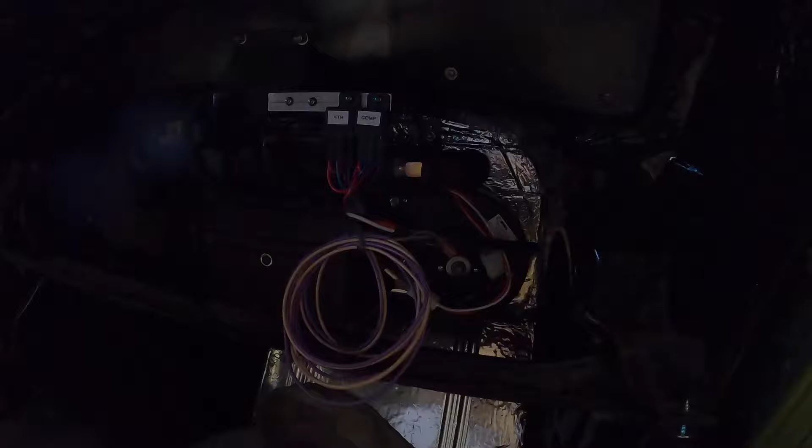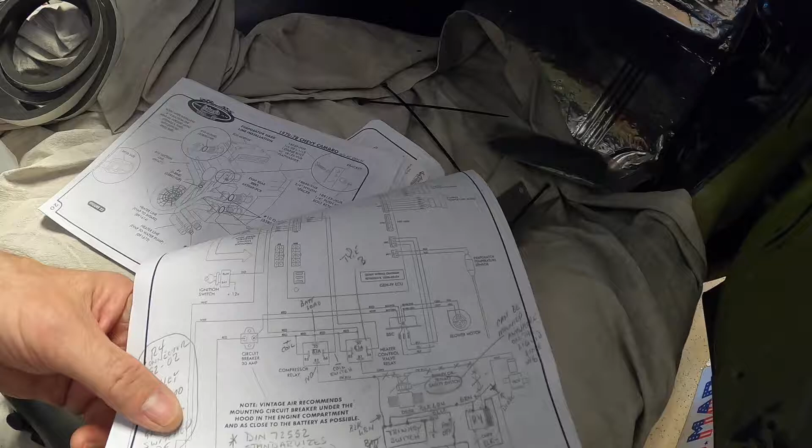I'm in the process of finishing up the wiring inside the engine compartment, and I just about got the vintage air AC done. I thought I'd check these relays and make sure they're wired up according to what Vintage Air is showing on their diagram. Looks like everything's correct, so all the wiring is going to the right places.

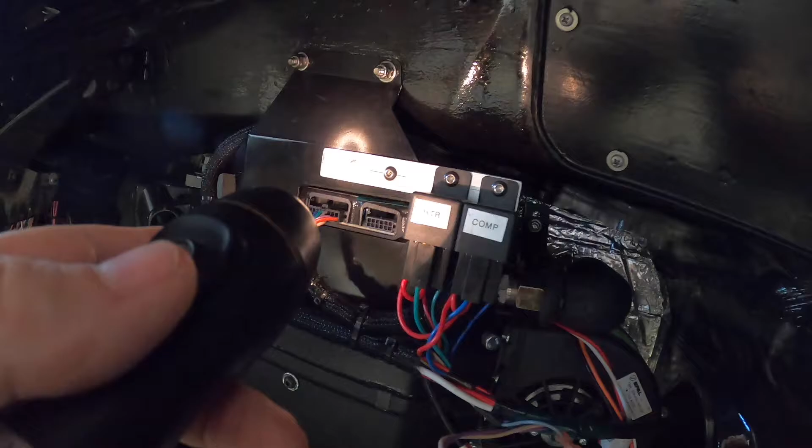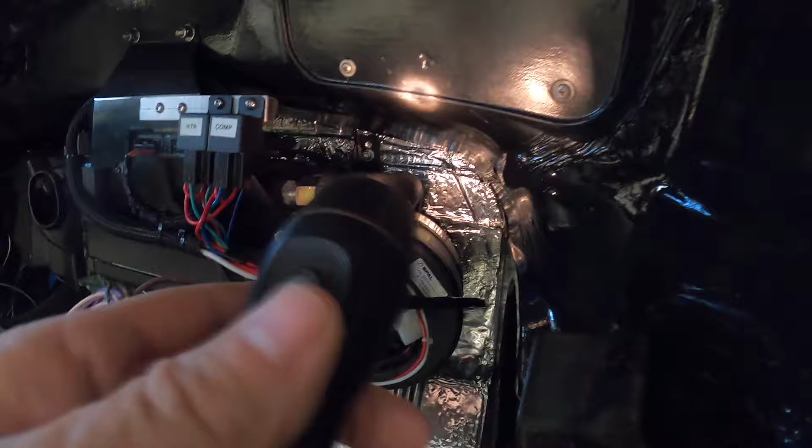I was trying to figure out the best place to mount these relays and still be able to get to them, so all I had to do is stick my head under the dash. I saw some people mounting them up here underneath the firewall dash area, and I've seen some people mounting them over here. I decided for me personally it would be better to put them here, and that seemed to be the easiest place to get to them.

So this is just a piece of aluminum flat stock that I cut, drilled some holes through for this top mount, and that way I can get to the nuts on the back of these relays pretty easy. Anyway, pretty much done in here.

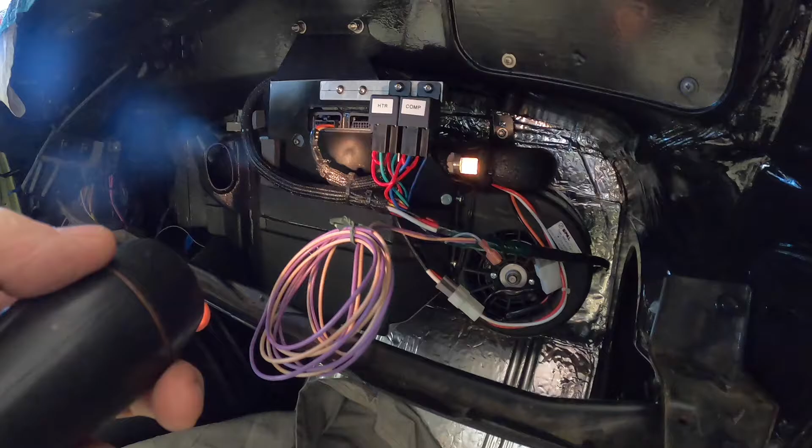The violet wire is your ignition power, and this tan wire is supposed to be for a dash backlight. Not exactly sure, maybe that's for the controller - we'll figure that one out later. And this gray wire here with the connector, the directions say that's for programming, so I don't think I'll have any use for that.

Anyway, we're pretty much done in here other than running the ducting. So we'll go out in the engine compartment and show you what's going on there.

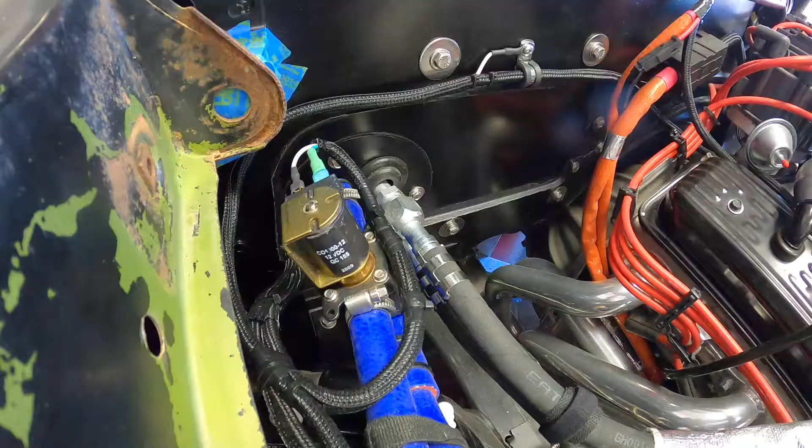My Vintage Air kit's pretty old, I think I bought it at least 10 years ago, maybe longer. So this is the heater solenoid valve that they provided, and it's kind of big and clunky. They sell a newer version now, a replacement in case this burns up - it's a lot more streamlined, seems to be more plastic, more lightweight. But anyway, this is what I got with my kit from Vintage Air.

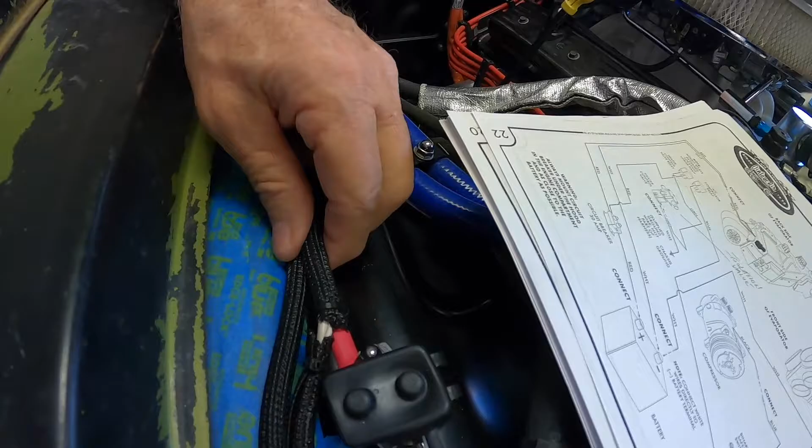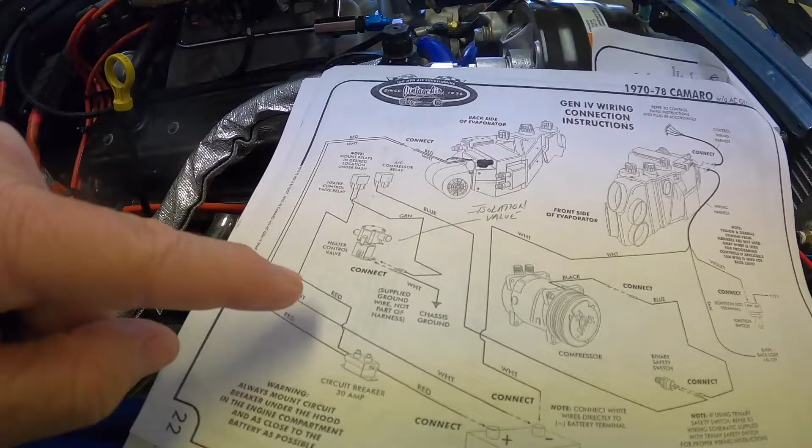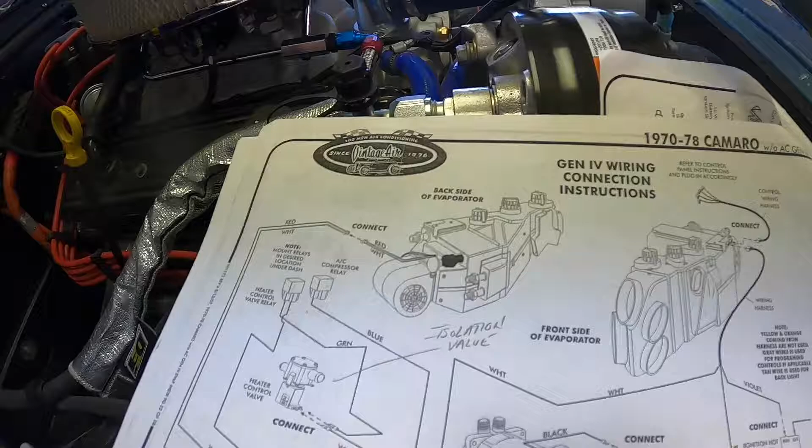The white wire here is your ground, and the green wire is what comes off the relay. There's two white wires in the sheathing and two red wires - this white wire here and this white wire here, that's these two. Then they provided two red wires: the smaller red wire is for the heater control relay, and the big red wire is for the blower, which goes through this 30 amp circuit breaker.

There are three styles to this: a manual reset where you have a little button on the side to reset them, an automatic reset where once the issue goes away or the circuit breaker cools off it'll reset itself, and a third style where you have to disconnect power from it in order for it to reset. I don't know which style they gave me, other than it's not the manual reset, so I think it's probably the automatic reset.

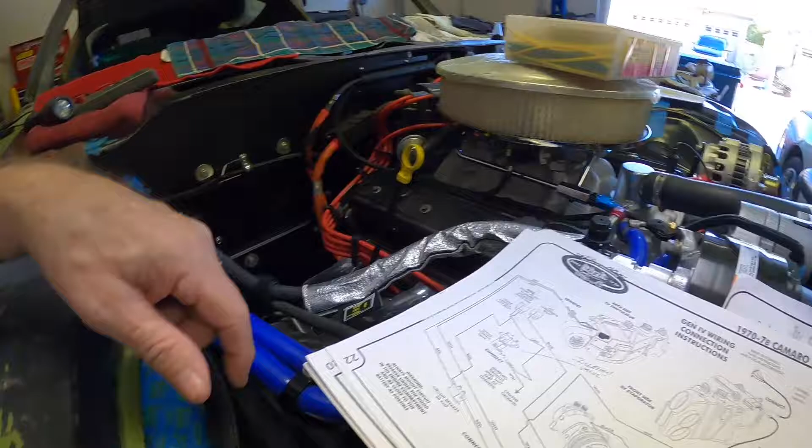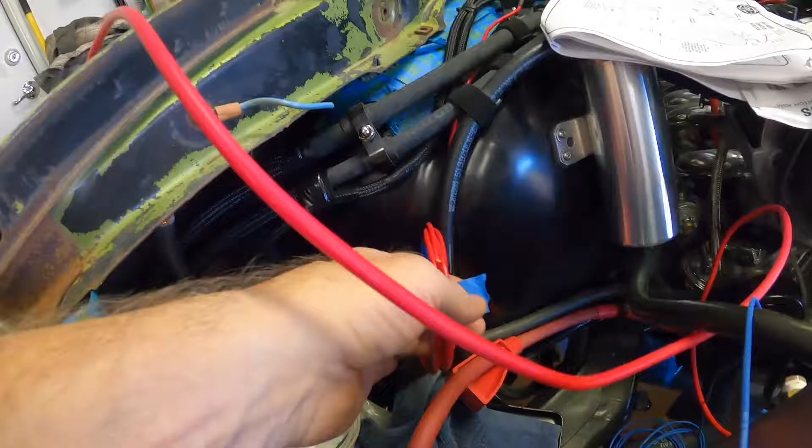In their instructions, they say to hook the hot wire and the ground wires directly to the battery. So that's this hot wire here and these ground wires. That's pretty much the wiring to the battery.

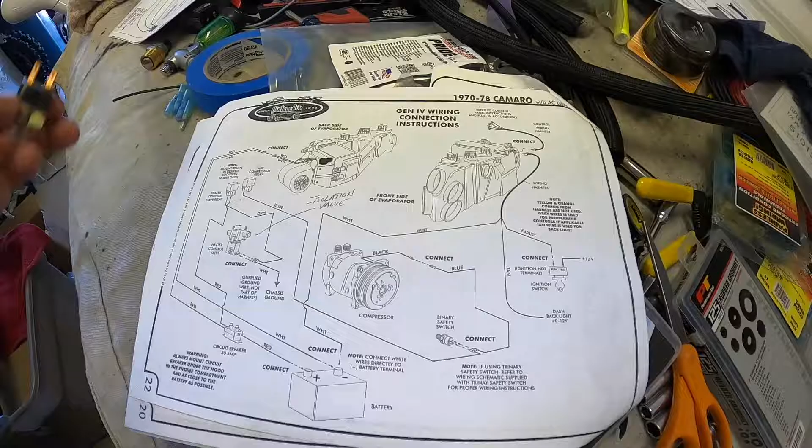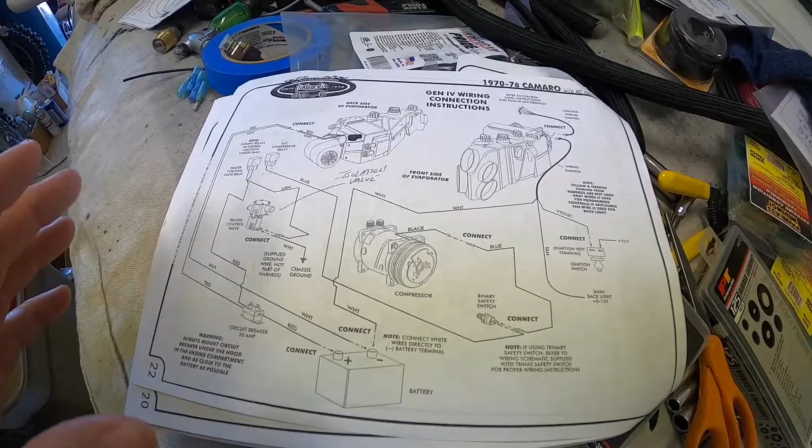Now their diagram here is set up for a clutch fan, a belt-driven cooling system, and that's why what originally came with the kit was this binary switch. So you won't see any fan controls here - it's pretty simplistic. You can go to their website and they'll show you how to do it with a trinary switch and electric cooling fans, which we're going to get into right now.

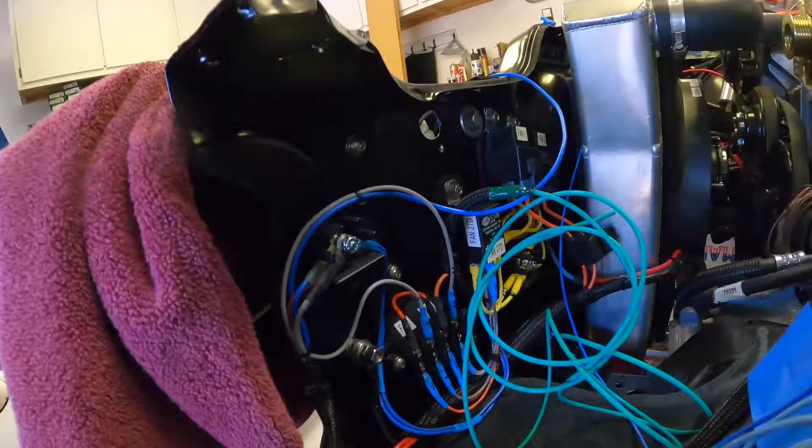So here's the trinary switch that I'm using. These green and black wires control the compressor, and these blue wires provide a ground for your cooling fans. Because I'm running electric cooling fans, there's my control system for the fans. But anyway, off the trinary, the green and black wires that I was showing you, that's what controls the compressor.

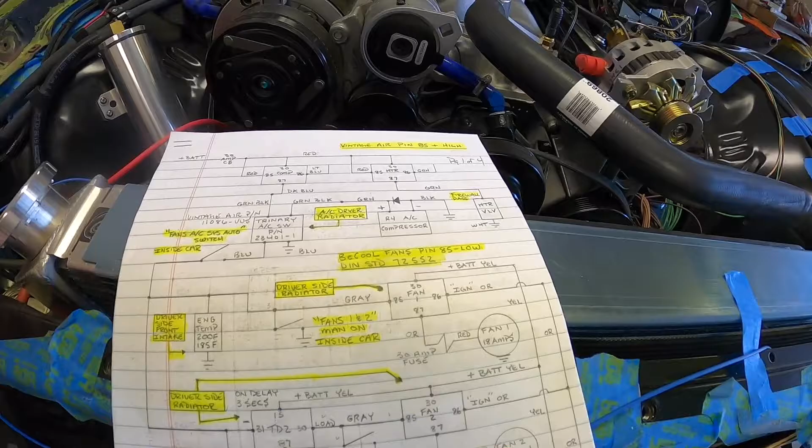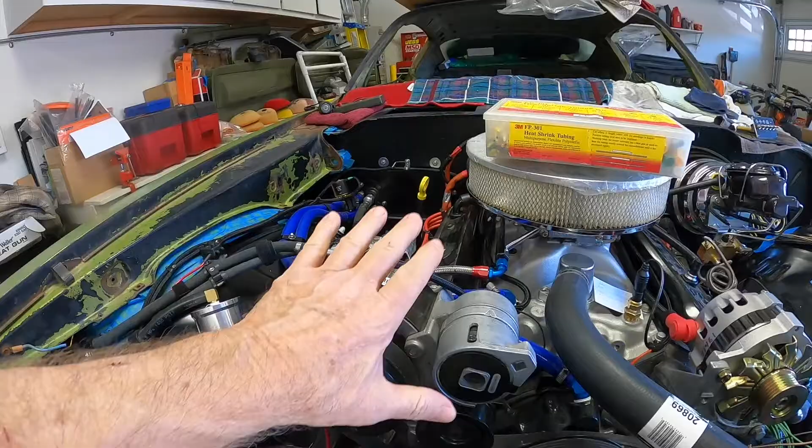On my compressor, I'm running a standard GMR4, and because I'm running Dakota Digital electronics, I decided to put a diode in here. What that diode does is prevent any backfeeding when the magnetic field on the coils collapses. When you kill power to this, it's going to try to maintain that current flow in reverse polarity, and it could backfeed the system with some current or voltage. Now, if your car is all electric with no electronics, you probably don't need to worry about the diode too much, but just to be on the safe side, I included it.

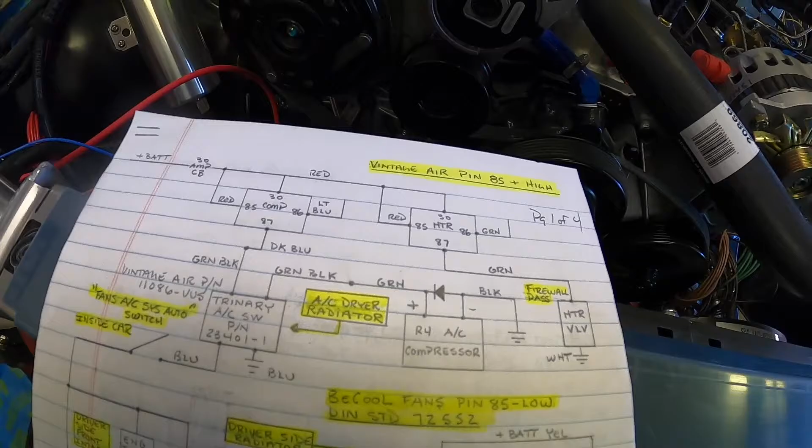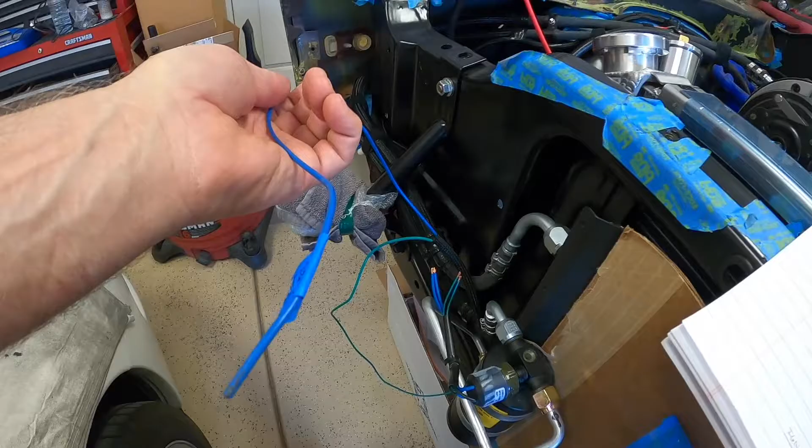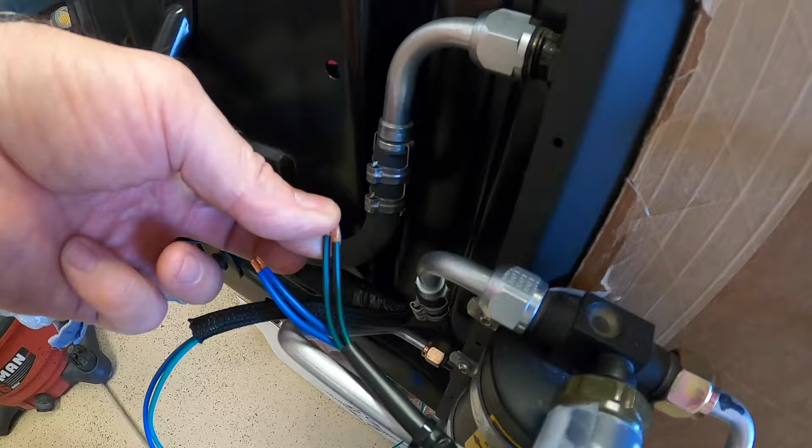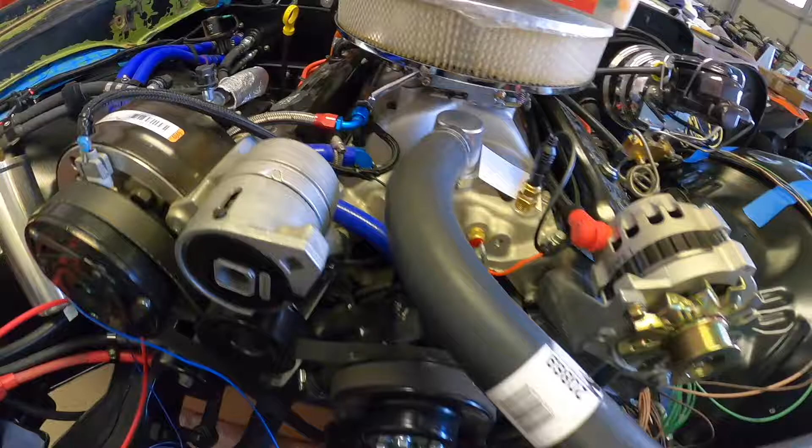Vintage Air used a dark blue wire coming off the relay inside the car and out through the firewall, and that's this one here. That's going to one side of the trinary switch, which uses a green-black wire. This green wire here is the wire that I put in, and that runs all the way over to the compressor. The other side, the ground, is the black wire right here. It would have been nicer for them to use a dark or a green or a green-black wire, but anyway, it all works.

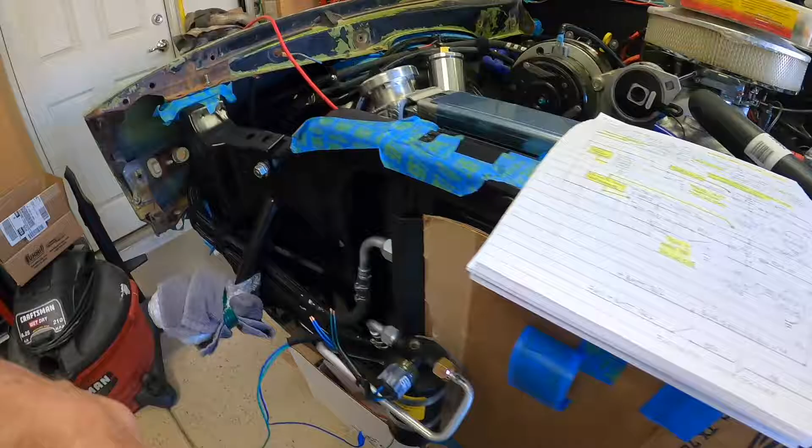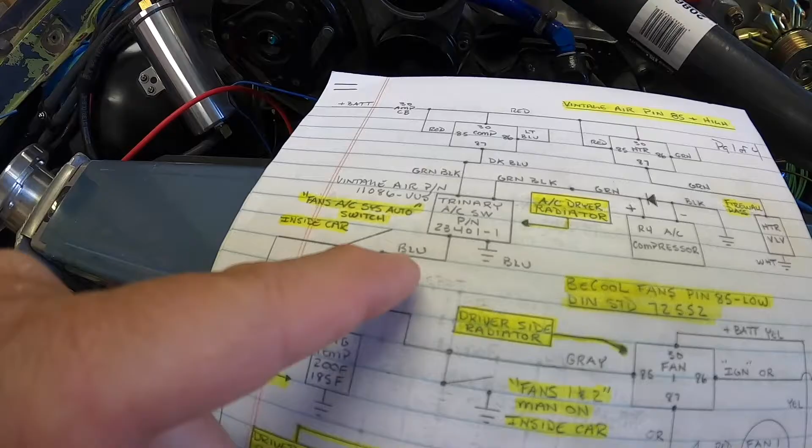For the radiator fan control, I ran a blue wire off the trinary, which is this one right here. This is going to go through the trinary, and then that wire runs inside the car up to this switch here. So that's this wire here coming off the trinary, and it's going to run through a switch that I installed here.

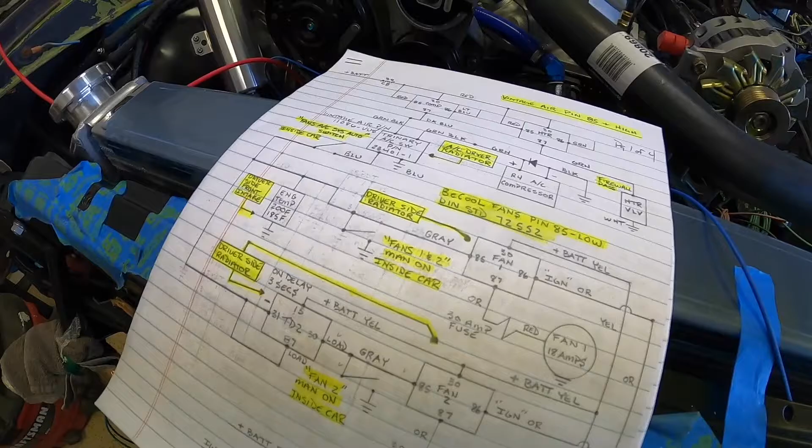The reason I wanted to do this was to be able to isolate the AC from the fan control if I wanted to. If for some reason this thing should fail closed, or we should have some other failure in the AC system, I wanted the ability to stop the AC from operating the fans. That's why I put this switch in here.

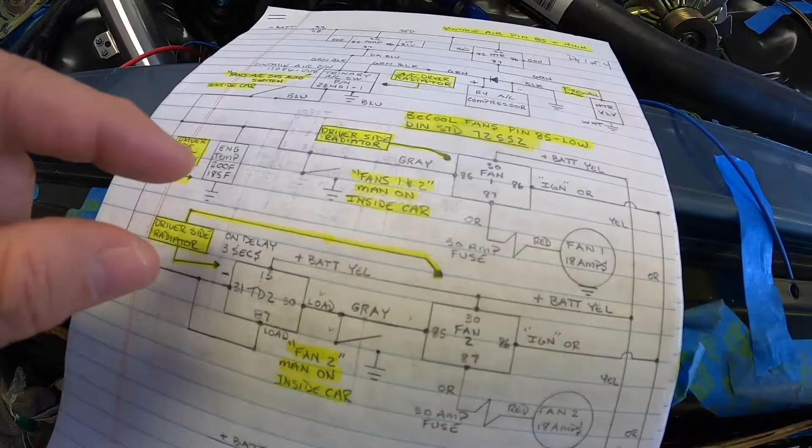So the blue wire is going to run to one side of the switch, and then the other blue wire is going to come down here and provide a ground. I'll show you where I have the blue wires over here on my control scheme. This is the blue wire coming from the trinary, and that goes down through here, and back into the car through the switch, then it comes back out right here. So if I turn the switch off inside the car, it stops the trinary from turning the fans on.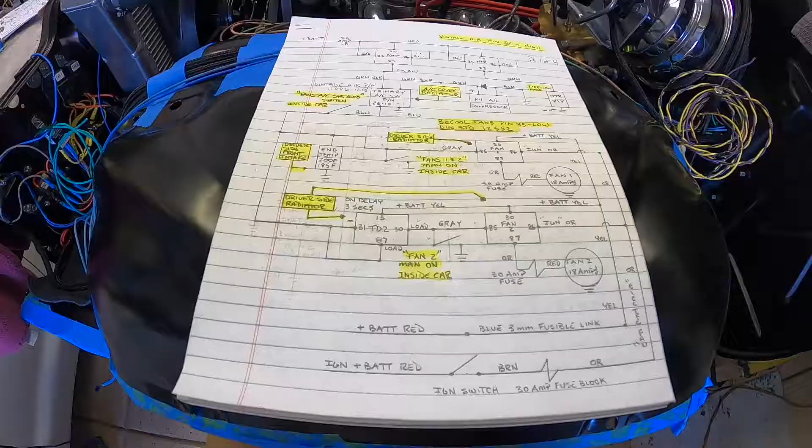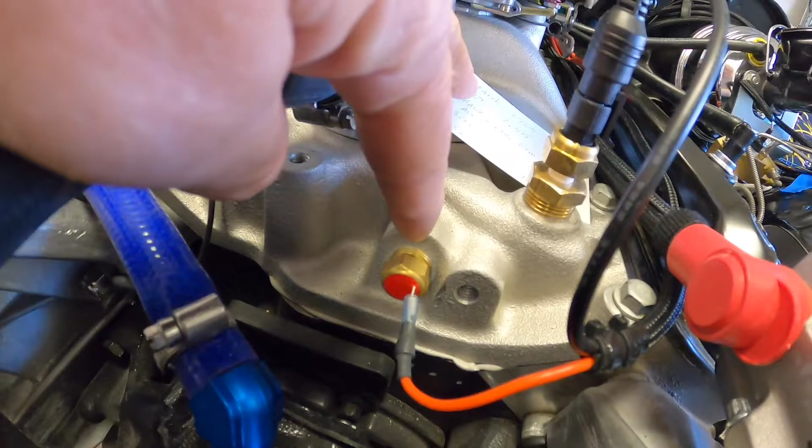Okay, I guess I should back up a little bit before we get too far gone on how I wired up my fans. There are going to be three basic ways for these fans to come on: AC control through the trinary, so long as this additional switch I put in is closed, and the engine temperature switch, which I mounted here on the front of the intake. This is the Dakota Digital temperature sender, which tells the instrumentation the actual temperature of the engine, but this switch is just used for fan control.

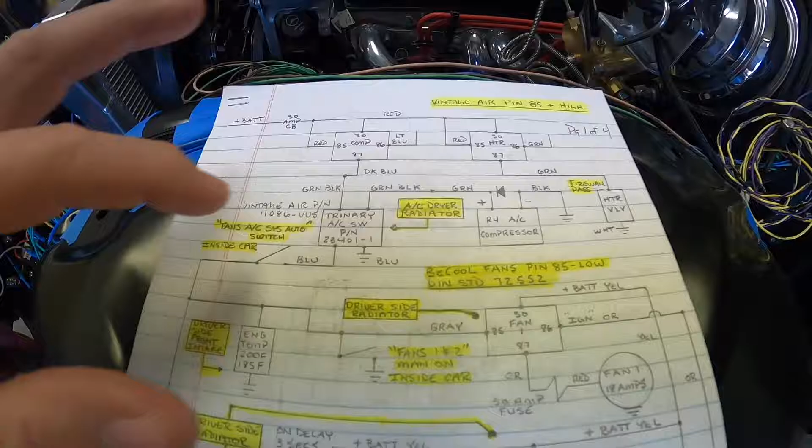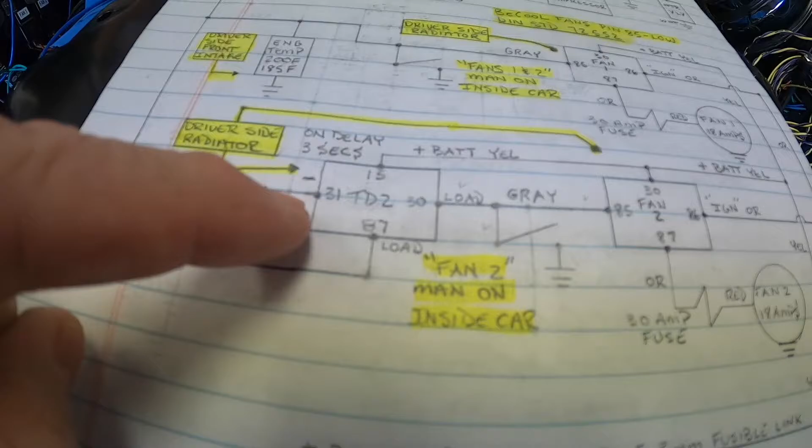So we were talking about the blue wires coming down here and providing a ground through the AC. The engine temp switch will also provide a ground directly to this fan, turning fan 1 on directly. The engine temp will also provide a ground to this time delay relay that I put in. This is one side of the timing coil that pulls the load contacts in. Once this sees a ground, because I have battery voltage sitting here at the top, this thing starts timing 3 seconds, and that will turn fan 2 on through the delay, either from the trinary or the engine temp. So either one of these, if it calls for fans, there's going to be a 3-second delay through this timer.

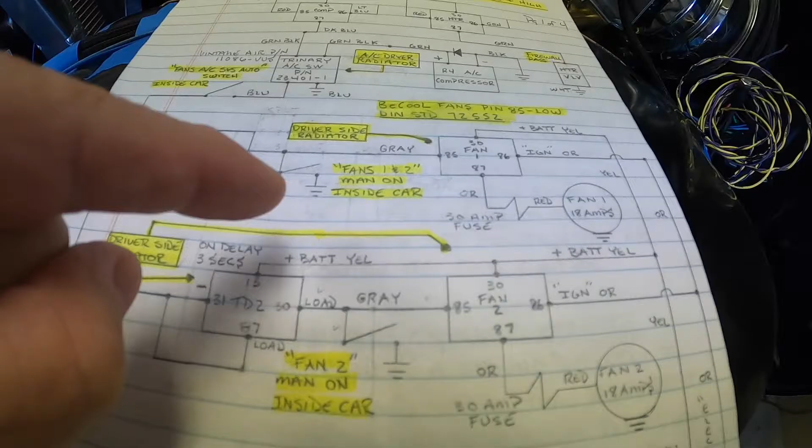I also put in a manual switch, and I've got to get this relabeled. This is going to say fan 1 and 2 instead of just fan 1, and that's going to be fan 2 only.

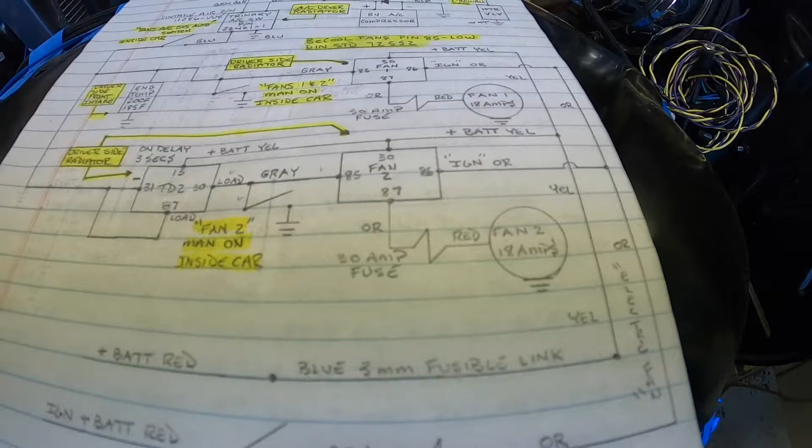When I turn this manual switch on, it's going to turn on both fans. However, fan 2 will be delayed 3 seconds. Now, if I turn fan 2's manual switch on, I've bypassed the timer and applied a ground directly to the relay, so fan 2 will start immediately. That's the basic control scheme I've got going on here.

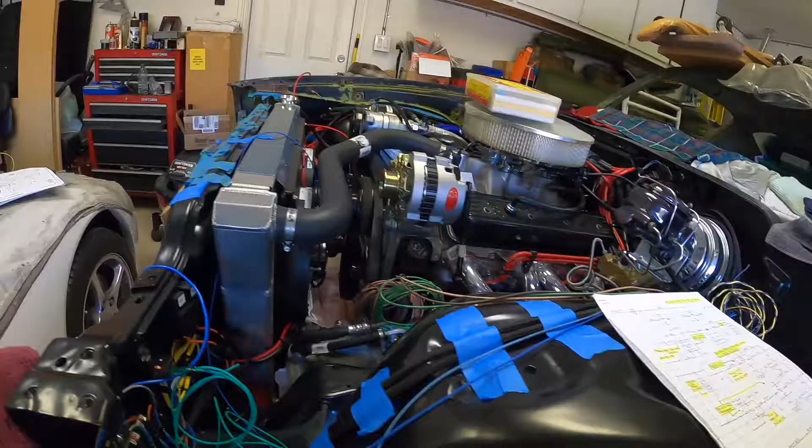So why did I put this delay timer in here? Well, this is a pretty big alternator, I think it's 160 or 180, but it's a pretty good size. Still, these BeCool fans pull 18 amps each, so that's a total of 36 amps.

And then also, when the AC is running, you've got that blower that's going to come on too. So that's three high amperage devices all possibly trying to come on at exactly the same time. I didn't want that big of a hit on the electrical system, which is why I put that delay relay in for fan 2.

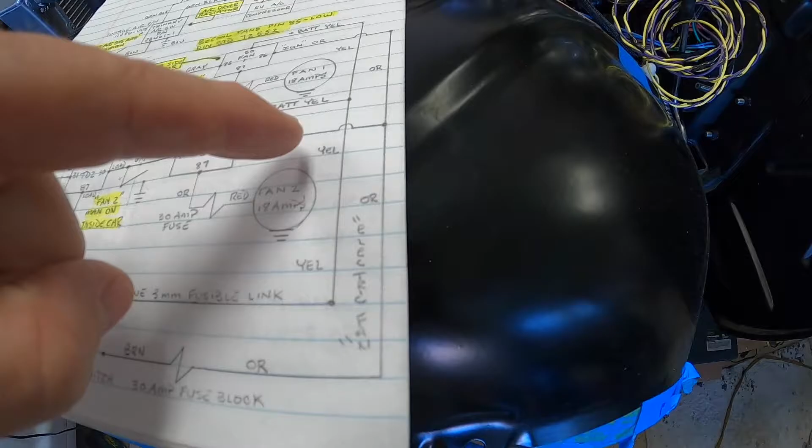As far as how I routed power around, I have an orange wire that came with the American Autowire kit, marked electric fan. I double checked, and it is switched, so you only get power to this side of the relays to operate the fans if the switch is in the run position. I don't think you get power in accessory.

I think you only get power to these fan relays in run, but I have to double check that part. Doesn't really matter to me, but anyway, that's how these relays get their power through the switch.

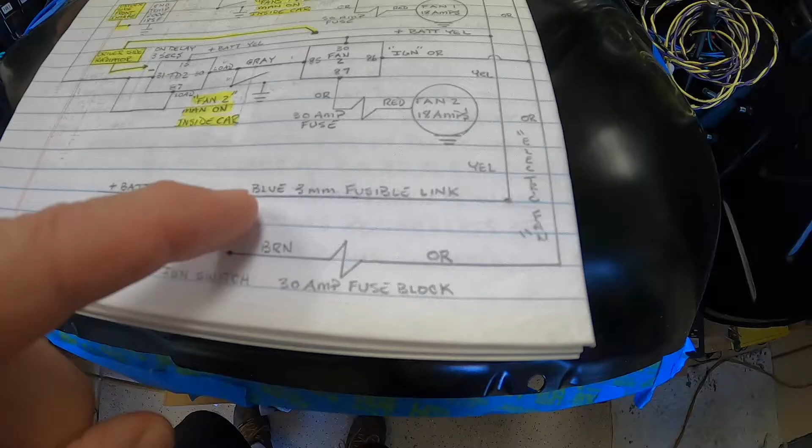And then the fans themselves, I have coming directly off the battery. Here's the heavy gauge wire off the fans. I don't know if the camera's picking it up, but there's a 3mm fusible link that runs directly to the battery, so I have protection straight off the battery.

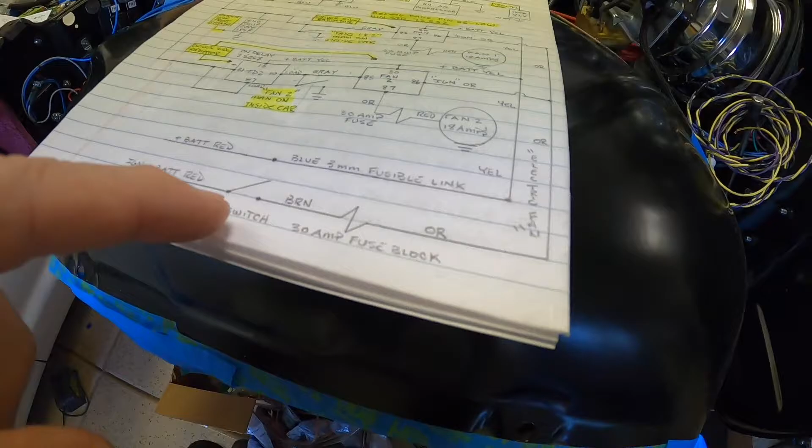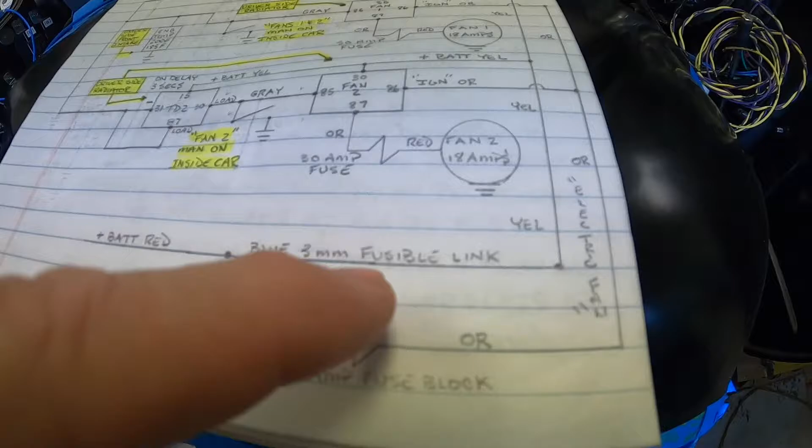I forgot to mention that the power for the relays goes through a 30 amp circuit or fuse on the fuse block. So I have the battery side feeding the load on these relays protected by a fusible link, and then on the fan side, through the relay, I also have separate 30 amp fuses.

I know it might seem like a little extra, or a lot, but I use Velcro, a belt, and suspenders to hold my pants up. I guess that's the only analogy I can come up with right now.

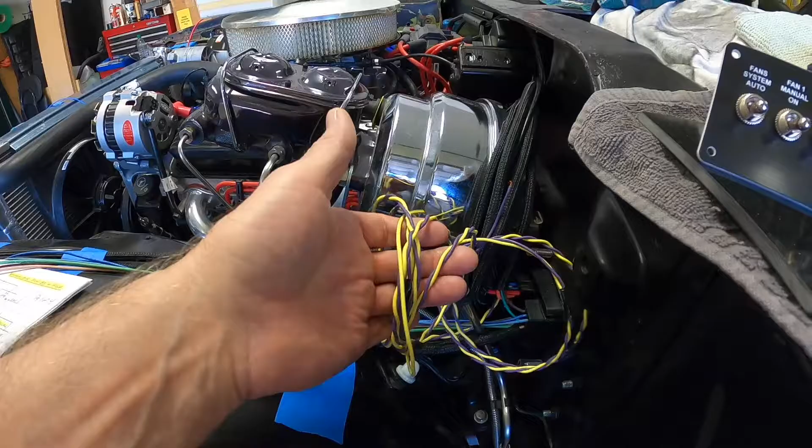Okay, so really all I've got left is lighting, horn, and finishing up the trinary and battery connections, and the engine compartment is pretty much done. Then I can move inside. This is for the vehicle speed sensor, it goes down to the transmission and tells Dakota Digital how fast we think the car is going.

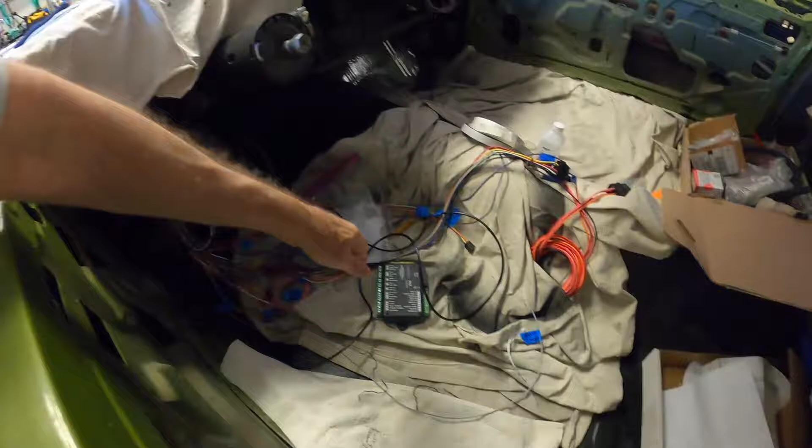Some of the hardest things to decide is where to actually mount stuff to get to it at a later date, without interfering with something, or blocking access to something else.

So I'm kind of thinking about maybe making a bracket and mounting this down on the bottom of the steering column. It kind of makes sense for all these connections, it'll be the shortest run for most of them. But anyway, just kind of a quick update.

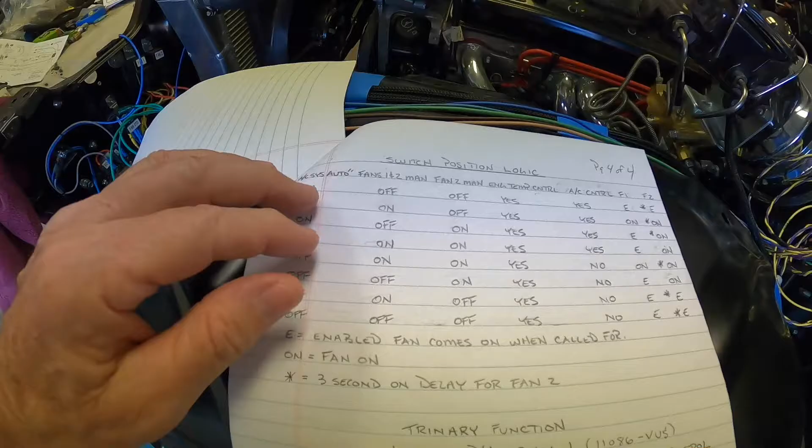I hope I didn't get anybody real confused. I did a video about a month and a half ago on my fan controlling system, and I had those original plans way more complicated than they needed to be. It was basically, I looked at it and just started laughing. I did a logic chart for all the different switch positions and what happens when you have this on, that off, or is the engine temp controlling things, is the AC controlling things, does the fan actually come on at certain switch positions, or is it just enabled.

When I did the first fan controls, it was too much. It was like, I'm not driving this car to the frickin' moon. So I've simplified it quite a bit since that video. But anyway, this is the final setup here.